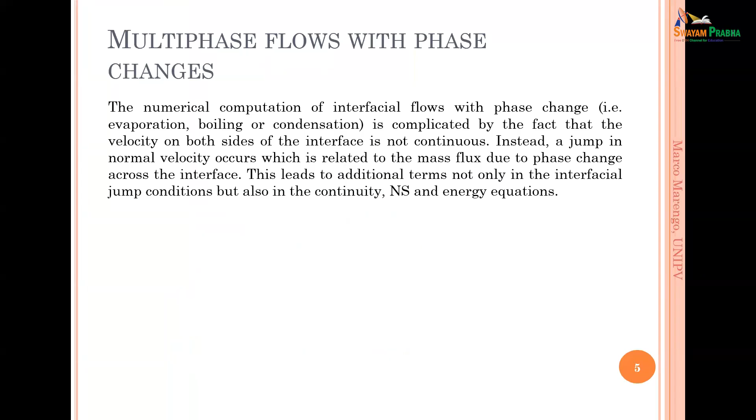Okay, let's continue. One of the problems is that when using these kinds of simulations, at the interface you have a discontinuity. Imagine in VOF you have values like 1, 1, 1, 1, 1, 0, 0, 0, 0, and then some other numbers - you are constructing the surface. But what's happening is that all the values related to the volume fraction are changing. So at the interface, we are even changing the velocity, and we may have one velocity that is different from the other. But as I said before, the velocity should be the same.

So we have a jump in the normal velocity due to, for example, phase change. The phase change is complicated in VOF or level set methods because we have a jump not only in the velocity, but also in the temperature and the pressure. Between liquid and vapor there is a jump in the pressure, and there is a jump in the temperature. So we need to deal with this in the proper way.

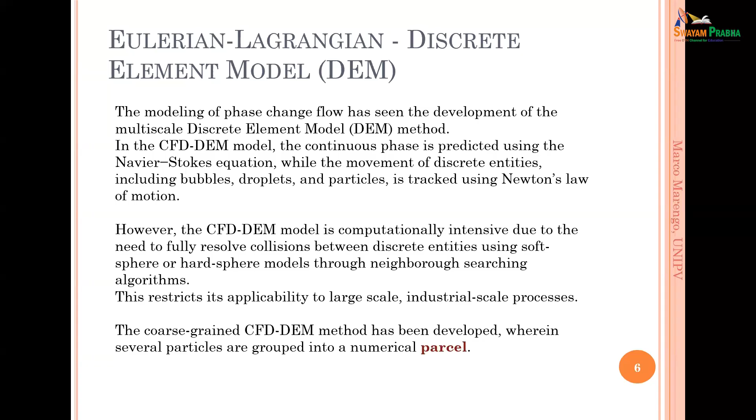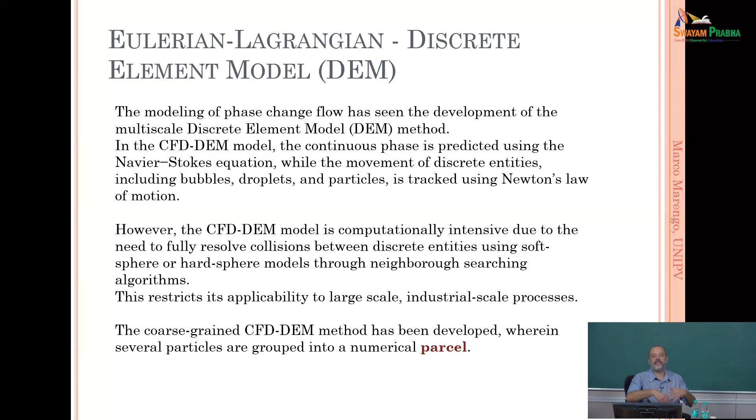With phase change, we have other options as well. We can use an Euler-Lagrangian approach, a DEM model with phase change. As I discussed, one way is to have several particles, droplets, or bubbles inside a parcel - so inside a digital bubble or digital droplet. This is interesting when we have large-scale processes like heat exchangers, evaporators, condensers, and so on.

For a DEM model, these are the equations of conservation, and let's talk about that because it's interesting. We have the conservation of mass, and already you see one change when we have phase change: we need to add one term linked to the fact that we have a change in the component, as we wrote when dealing with multiphase flow. So if we have a phase change, we need to include a term linked to the fact that we have liquid going to vapor or vice versa.

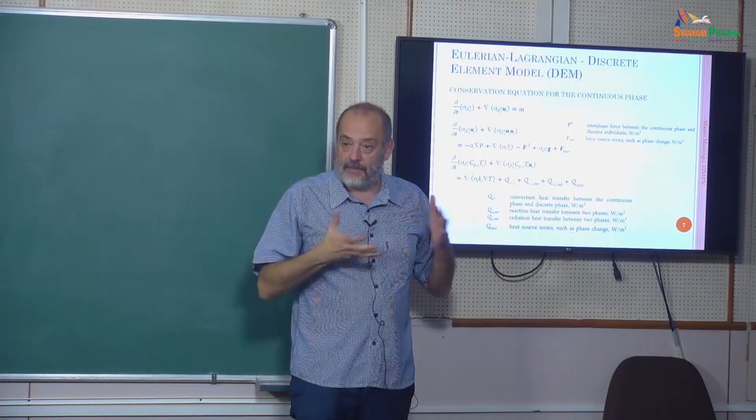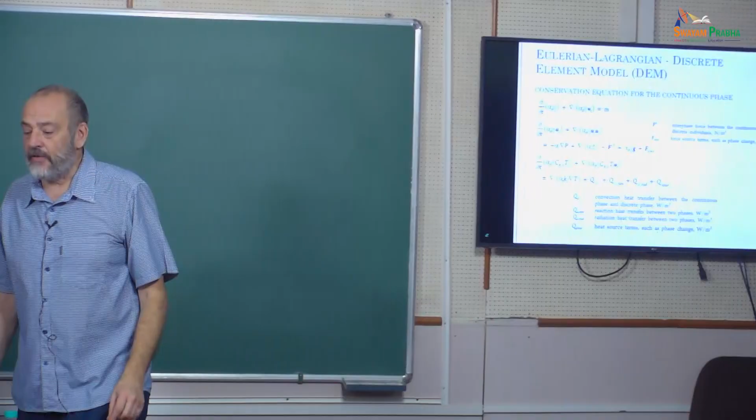Then we have another important term in the momentum equation, which contains the interphase force between the continuous phase and the discrete parcels - the force between them. But if we have phase change, we also have a force source coming from the phase change. Imagine a droplet that is evaporating very fast - we have a flow, the so-called Stefan flow, from the droplet producing vapor that goes outside. This creates pressure, because every time there's motion, there is a pressure. So this is a force, and we need to include this force related to the phase change.

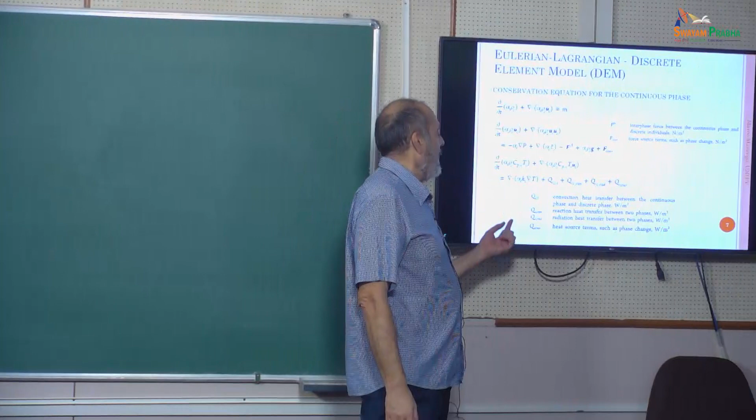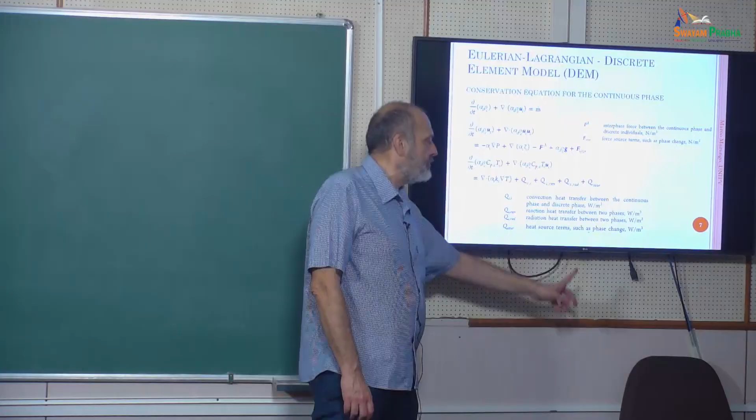Then we have another term linked to the energy equation. Here we have convection, we may have reaction between the two phases, we have radiation, and we have a heat source term that is linked to the phase change.

Now, the problem is that with the Lagrangian solution, we need to write the equation of motion for the parcels - a classical Newton's law for mechanics - and what becomes very important is understanding which forces are acting. Same thing for angular momentum: if particles are not spherical, they can rotate, so we may have angular momentum. The Euler-Lagrangian simulations are very strong in this respect because we can really capture different situations in terms of rotation and rotational velocity of the particles.

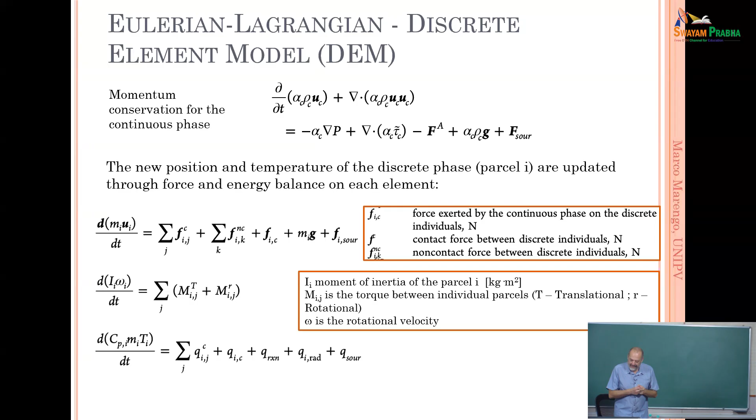And then we have the contact force, so this is what I said now. And then we also have the force that is linked to the phase change.

So in order to describe where is the closure, where are the closure equations? Of course, the closure equations are here with this Fa, because the force that is felt by the continuous phase is the same force that is felt by the parcels. So we need to have the coupling.

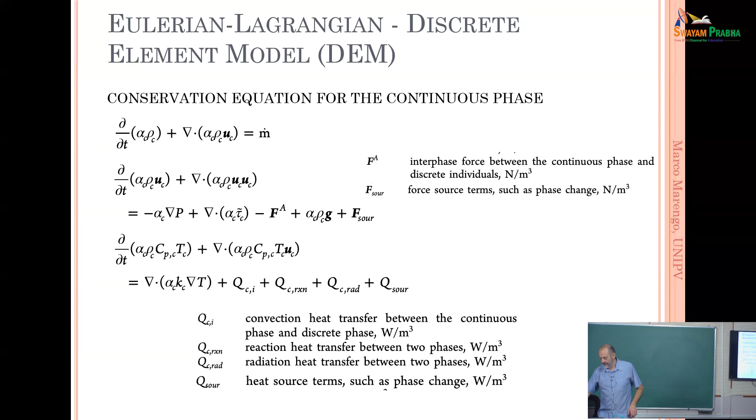The coupling is the secret, let's say, of the simulations. And so we have, for example, Fa in the continuum phase equation, the momentum conservation, written again in terms of the forces that are acting on the parcels.

And here we have the force linked to the parcel interaction.

We have the buoyancy, for example. We have the Saffman and Magnus force. The Saffman force is a lift force. The Magnus force is a force that is related to the spinning of the droplets.

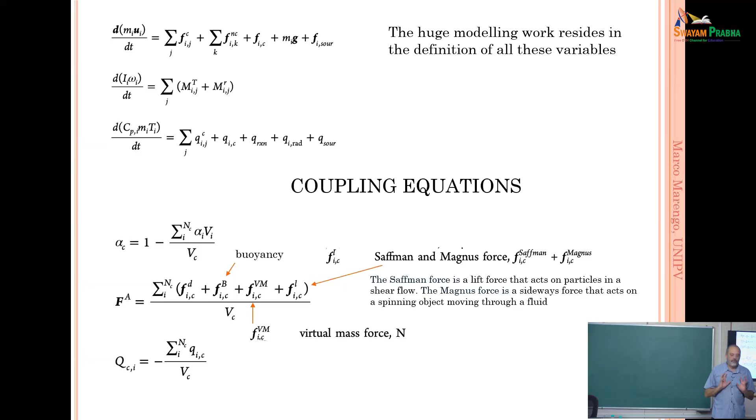If you have an example: if you have a ball, a basketball, and you throw the basketball from a building, it's not going to go in this direction, but it's going to start rotating, and this rotation is going to change the motion.

So it's going to, we can say, go to spiral. So this is the Magnus force. I'm saying this because maybe you know it, but I want to be sure.

And what is also interesting is that there is a virtual mass force, which is the force of the parcels together that are acting on the continuum.

Because the fact that we have, let's say, the disperse flow is adding mass to the system locally. And this is, of course, something that we need to consider inside the so-called virtual mass force.

The things are becoming really very complex because, for example, the contact force has a tangential and normal component, and then look at this—there are pages and pages of equations. So I stop here, but only to help understand it.

And these can change from one paper to another, because, of course, everybody has ways to tweak the problem. So, for example, we can say that the normal component is a factor, Kn, and look at the equation for Kn and all the other equations here to describe what is happening.

So it's becoming a little bit tricky.

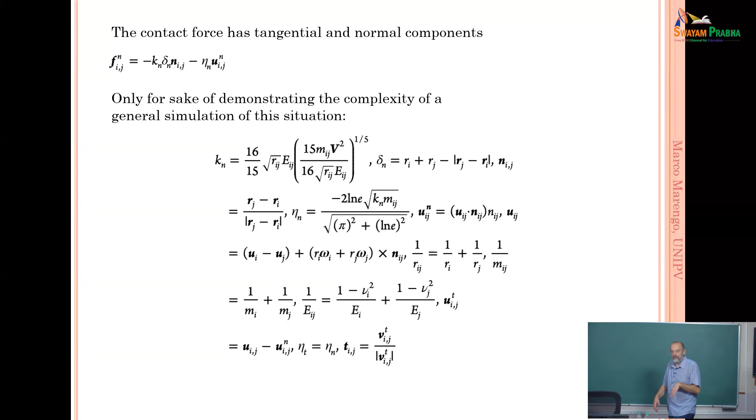For example, these people are putting 16/15. Okay, someone else says, oh, I don't like 16/15, it's 1.2. Okay, good, let's tweak this value. And so on.

And of course, this can be really— I don't want to give any explanation of that, it's not my field. I'm Euler-Lagrangian is not my field, but I know the principle of these kinds of simulations.

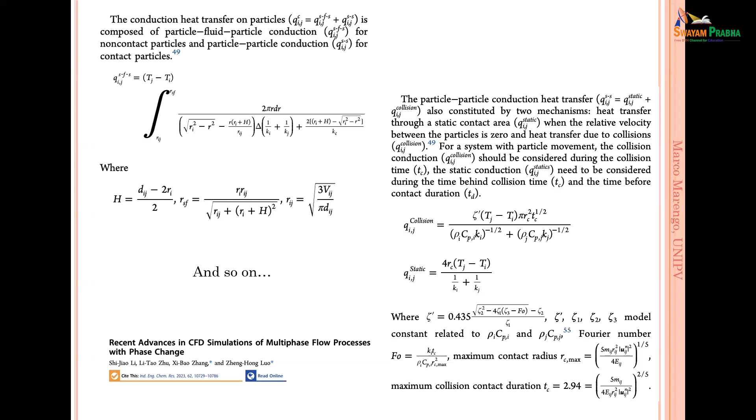...still research. As I said, all these coupling forces, coupling energy, heat that is going from one phase to another is a question of tuning in many cases.

So it depends on the material, for example, the conductivity of the particles, and how can we deal with the conductivity of the parcels, because the parcel contains many particles, maybe with different conductivities, because we don't have only one solid particle, maybe we have different components of the solid particles, and it's becoming real.

If you think about the applications, it's becoming really very complex, because you may have really, in the application, different components, different phases, and we have reactions, chemical reactions.

We may have Eulerian-Eulerian model, again, the same problem. Again, I'm not entering this, but it's interesting to know that we may have an Eulerian-Eulerian model with phase change.

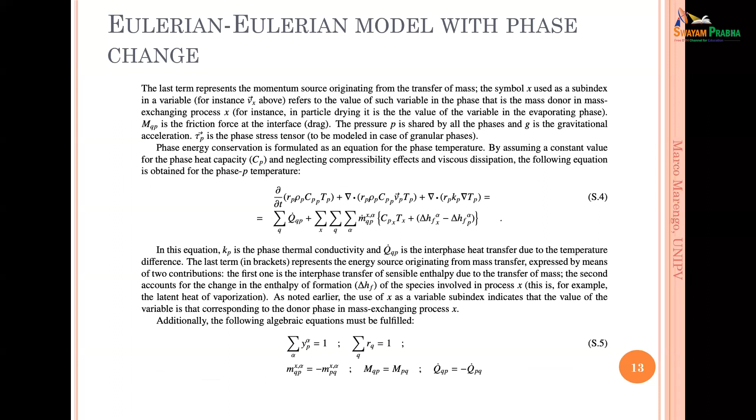One can think, okay, it's complex. But I didn't speak about one thing until now. Nobody said something, I was silent about the turbulence. Because of what I said, imagine how amplified it is when we are also considering turbulence. Until now, it's laminar flow - we didn't put anything about the Reynolds stresses and so on.

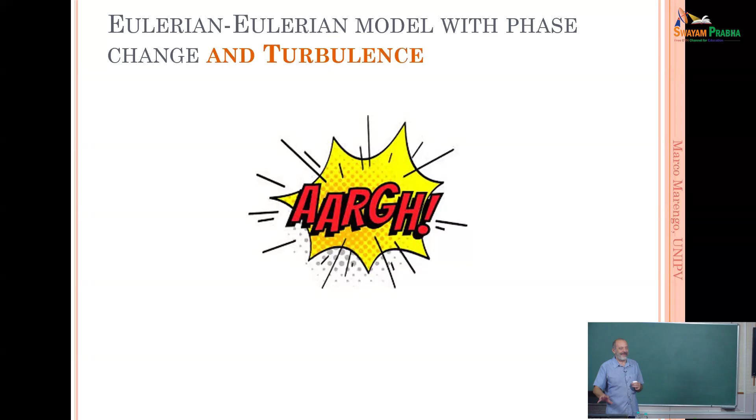But if you are adding also the turbulence, then it's becoming very complex. So I didn't want to put only that. I said, okay, it's becoming too difficult, of course. It's even something that I should really study in detail. I must be very honest.

When I'm dealing, for example, with my droplet simulations, turbulence is not entering the process so much. When you have a droplet impact, you have vortices and all this kind of stuff, but not really turbulence. But my colleagues, for example at the University of Wien, Alfredo Soldati and other people, are dealing also with turbulence. And when you're considering turbulence in sprays, imagine this is becoming really, really difficult.

So this is really the frontier of research. I need to stop because it's not for a basic course, and I'm not an expert because I'm not doing this for my research. But this is becoming something very, very complex.

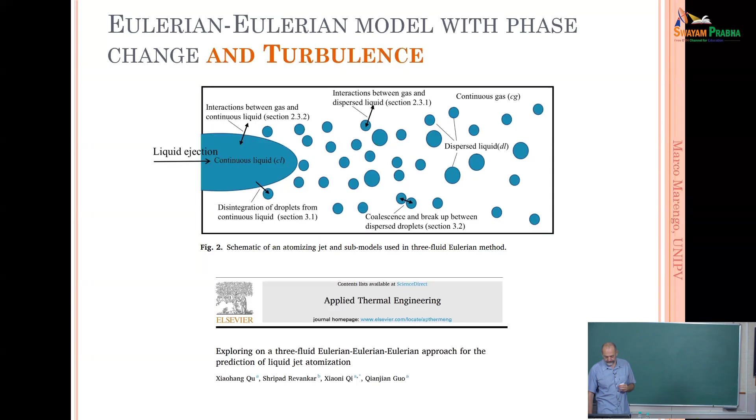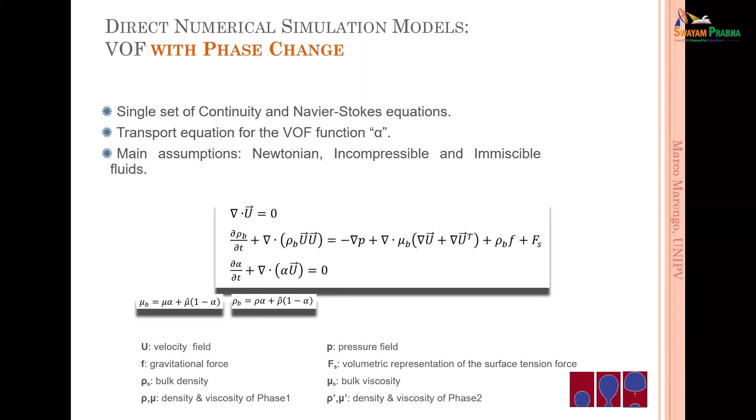Let's come back now to something a little bit easier, the turbulence. We would like to understand how to deal with the VOF when we have a phase change. So what is happening? We already wrote the expression of the VOF, and as I said before, what is important is the Fs.

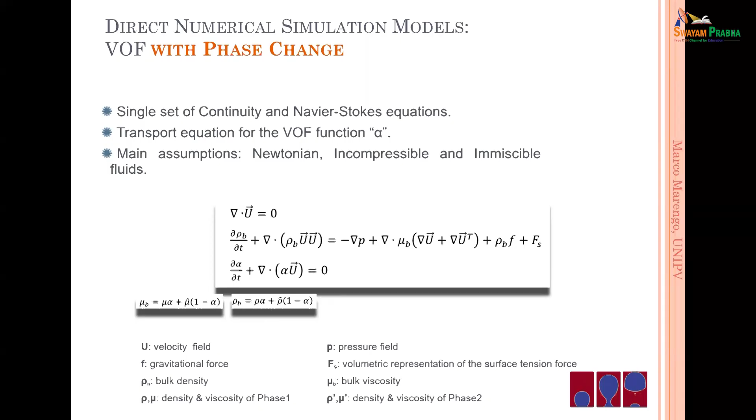In the VOF, we have a volumetric representation of the surface tension force. We may have different tools to do that. We have interface sharpening, which is important to have a very sharp, nice interface. Everything is fine - but one of the problems of the sharpening...

When you're doing, for example, an air bubble rising in a pool - this is a box containing a liquid, and we have a bubble rising. At a given point, instead of being very symmetric and going up, this bubble is going to dance - it's going to move. This is not happening, of course, in reality. It should go up and stop.

But this is a numerical problem, linked to the spurious currents that you may have. So the droplet is really dancing - it's not even going to follow a trajectory to the center, but is still moving a little bit. In this case it's going to the right; next simulation it goes to the left, because it depends really on the situation.

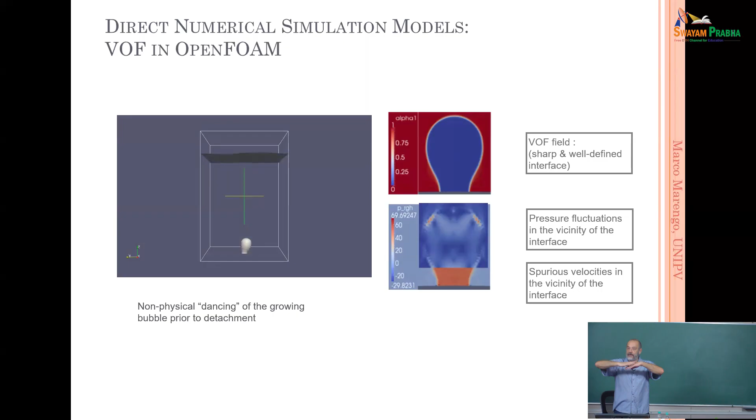Then you have the bubble going to the surface, and the surface moving - this is a classical case where we have a problem with spurious velocity at the interface. You can see, for example in this image, that we have pressure fluctuations at the interface. This is due to the fact that we are reconstructing the surface using a kind of approximation of the volume fraction value when we have a variation from 0 to 1 or from 1 to 0.

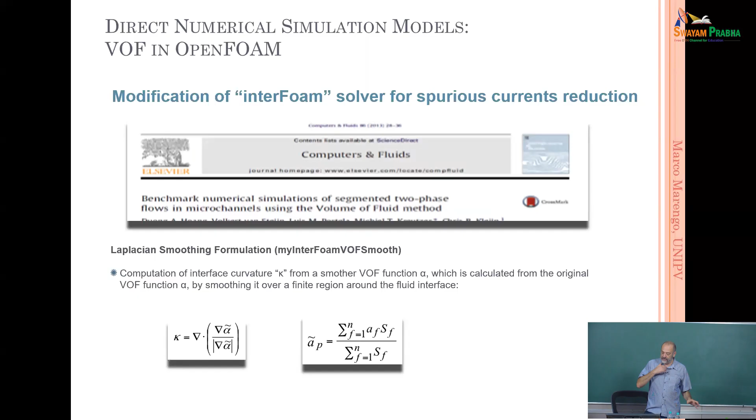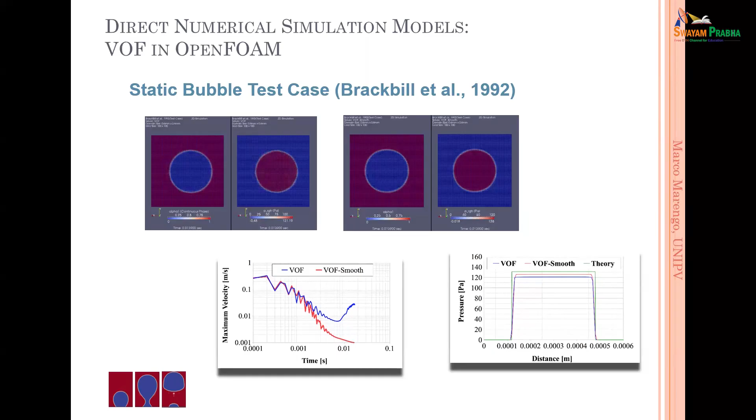Now we need to avoid this. There are different ways to do so - for example in OpenFOAM we have interFoam, VOF smooth variation, and so on. So we have different ways to do that, and in fact things are going to be better. You can see here that the maximum velocity of the spurious currents, for example in the case of VOF smooth, goes really down a lot, while the common VOF has a problem with that.

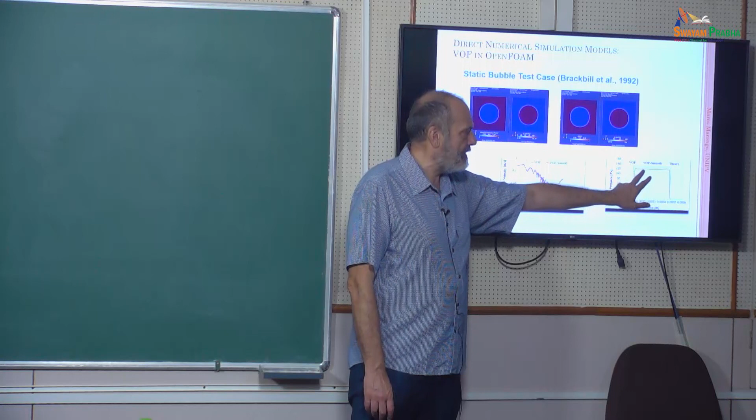The pressure theory is the green line, and the capillary pressure is the red and blue for the smooth and non-smooth solutions. As I said, level set is much better in this case, so the capillary pressure you get with level set is good.

We have a problem with mass conservation, but also with VOF, if we're not paying attention, we have a problem with mass conservation. At the end they are similar, but for the capillary pressure, the Laplace pressure, we need to accept it's not exactly what we'd like to have - there's a little change. You also need to consider that the theory assumes a very sharp interface, and here the interface is not really one cell.

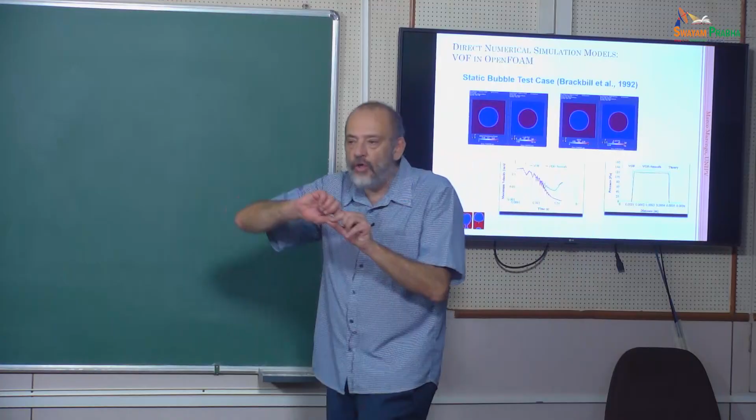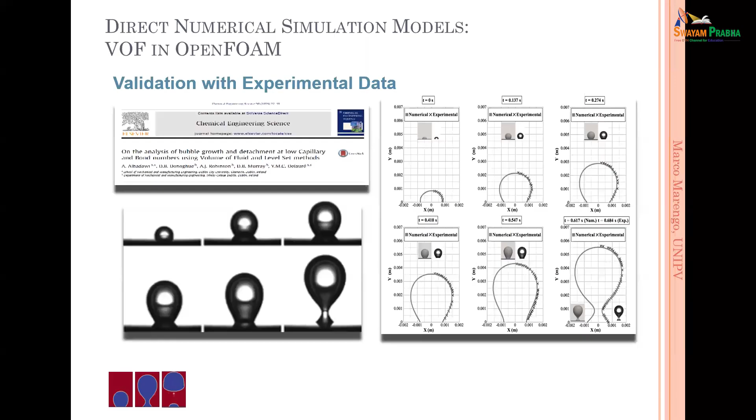One can validate the OpenFOAM results, and they are very accurate. This means that when dealing with problems like droplets, bubbles, single droplet, single bubble, or a bit more than single, the approximation is quite good at the moment.

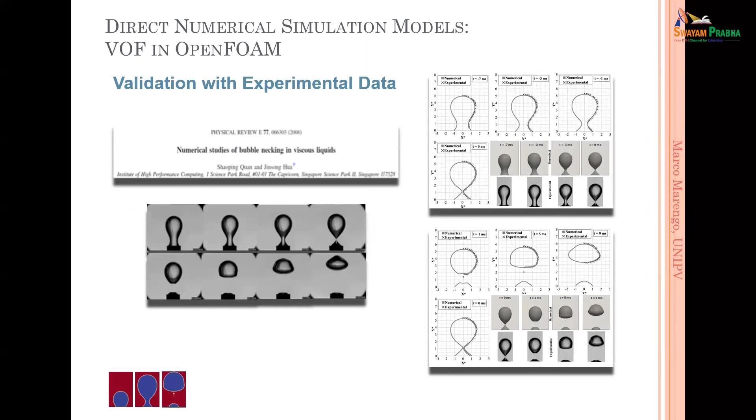There are also codes that are not commercial, from other groups around the world. There's also another code called Basilisk from Professor Stéphane Zaleski in Paris, a very good code for that. So we are able to simulate.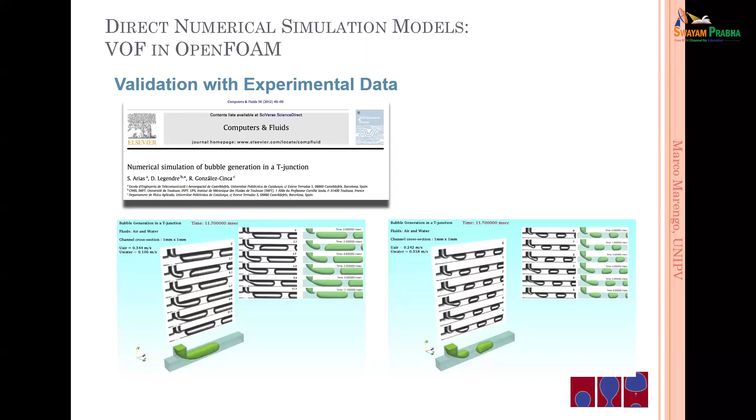So it's really interesting what we have here. You can see, for example, another problem where gas is entering a channel - we have a T-junction, and you can see these images, this is the VOF simulation, and it's very, very precise.

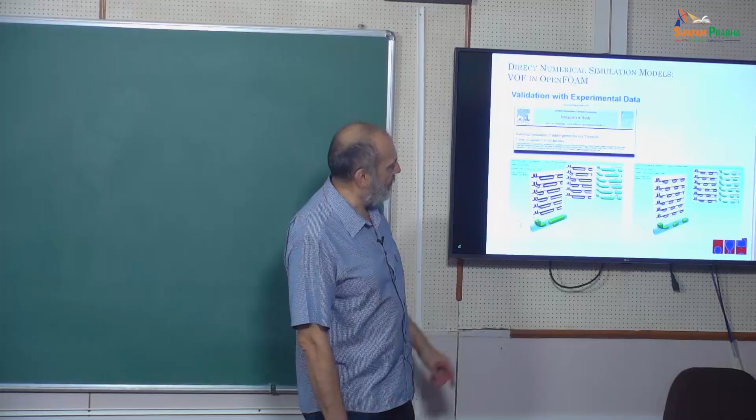One thing that happens if you're not precise enough with the simulation is you may always have a little bit of gas, so it's difficult to get the right time for the breakup. This is a test - these are usually the tests we do when comparing with experiments, the classical way: bubble rising on a pool, the T-junction, droplet impact, and so on - the normal tests for this.

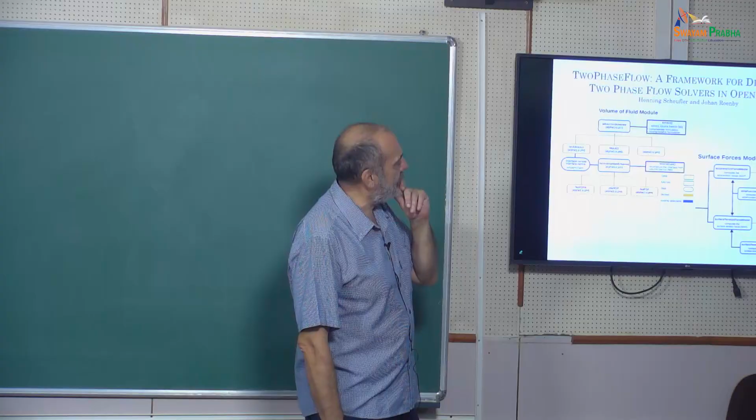This is a slide I got yesterday from a student, Raul, who is working in this field, showing what is done in OpenFOAM about the reconstruction of the surface and the surface forces. You have different cases, and honestly...

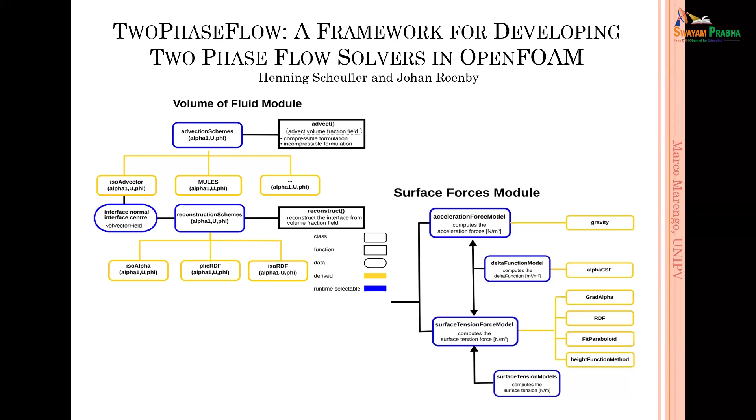You need to choose the right one - it's a combination of the advection schemes and the reconstruction schemes. There's no general rule, so you need to really try your best combination, try different cases. Raul, for example, did this at the very beginning of his master's thesis because we wanted to know, for our case, which could be the best combination of advection and reconstruction.

This is becoming a little too detailed for today, but only to tell you what is happening. We can do many different simulations, also with heat transfer.

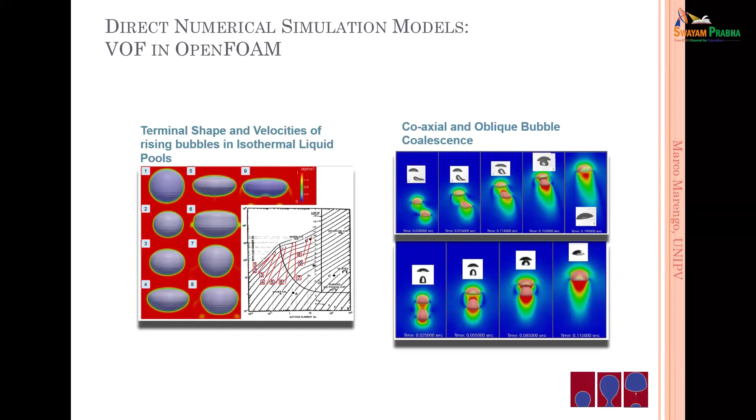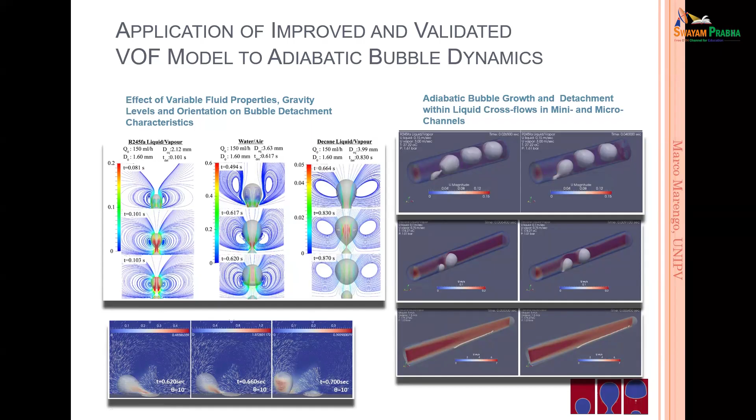This is, for example, our simulation of a bubble that is growing. Again, as I said, we need to patch a bubble to allow it to grow and go away when we have a phase change. In this case, it wasn't a phase change yet, but we have a hole and we inject air - the air makes the bubble grow, and then the bubble goes away with breakup. So it's interesting because we are producing bubbles like a Taylor flow inside the pipe.

Now, what is happening again when the VOF is with the phase change? When we have the phase change, as we saw before, what is changing is the conservation of mass, that we have now a source term linked to the phase change. Can be liquid to vapor or vapor to liquid, can be condensation or evaporation.

We have a surface term accounting for the surface tension as we did before, and we have a source accounting for the gravity. And here we have the source term representing the heat of evaporation. And we don't have here terms like the force linked to the phase change. Remember that there was a force linked to the phase change? No, we are not considering this.

Honestly, someone tried to put this, and there are codes where, even in OpenFOAM, if you want, you can add this term. Some of my colleagues said, okay, I did, but there was no change really. So otherwise, you should add one term that is a kind of pressure force linked to the fact that we have a phase change. But if the phase change is really not super fast, it should be okay. In fact, in the general theory I did, there was also a term to consider, but it's okay. In this case, it's not.

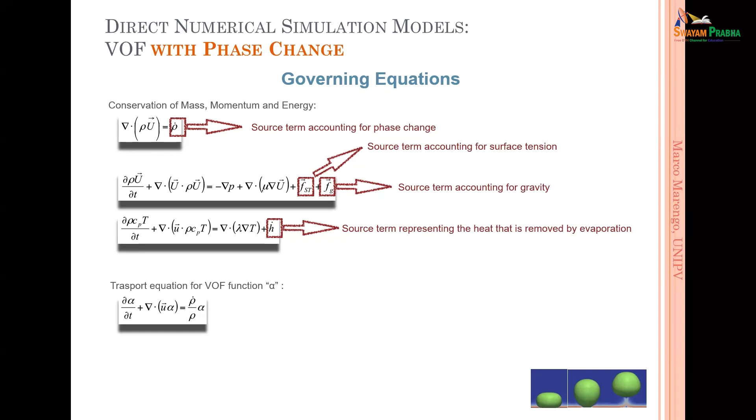And the big change is also with the phase transport equation, because we need to consider that we have a density variation in time due to the phase change. The local and time variation of the density means that also the transport equation is changing form. And we have now a rho dot. If you think rho dot divided by rho multiplied by alpha, it's nothing else than alpha over t, so it's the variation in time of alpha, but due to the phase change, because we have a rho dot. Again, we have the bulk fluid properties as an average with the volume fraction.

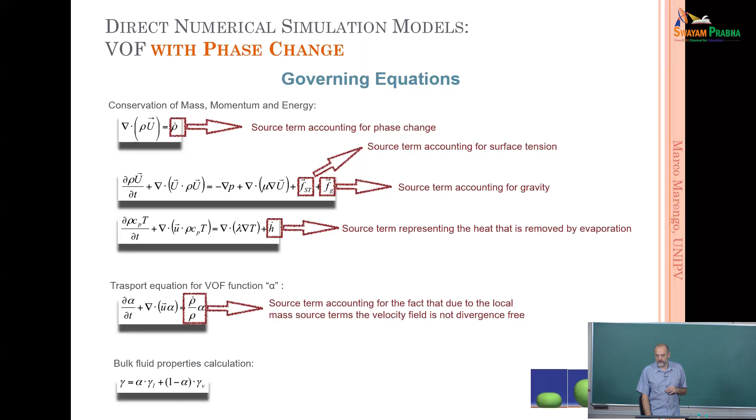When we need to consider phase change and we have the energy equation, one of the very critical points is to understand how can we calculate the rate of evaporation, for example. We have a droplet that is evaporating, and we would like to know how much mass from the liquid to the vapor is passing through the interface.

So we can use, for example, this expression that is saying we have the temperature of the interface. Which is the temperature of the interface? It's the temperature of the cells where we have a value of alpha that is different from 0 and 1. So imagine 0, 0, 0, 1, 1, 1, or vice versa. We have cells where we have something in between, and they have a temperature, because in OpenFOAM, which is a finite volume method, in all the volumes we have a temperature.

So this temperature is the interface temperature minus the saturation temperature. So we are not considering metastable conditions. This is another point. We are in equilibrium, not metastable. We are considering the saturation temperature. We are not going inside the two-phase region. Divided by what? Well, we can divide it by the latent heat, normally calculated at the saturation temperature, which is fine.

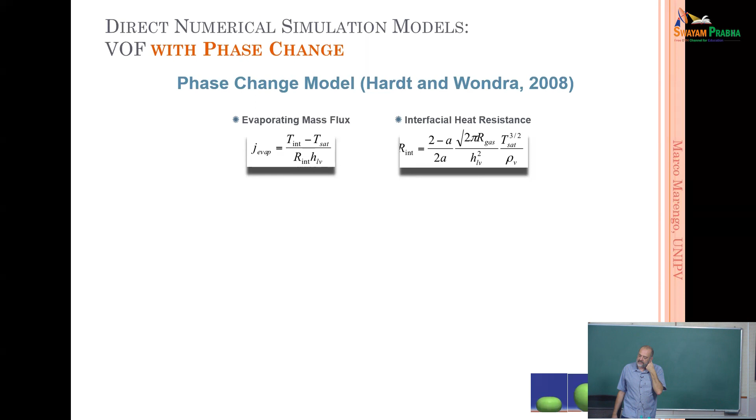I mean, we are playing with this. I'm not satisfied by this, but okay. There are, let's say, molecular simulations that are saying that this should be in this direction. This is coming from statistical physics, and we have this term that is the interfacial heat resistance that was proposed by Hardt and Wondra in 2008.

The point of this equation is that from the point of view of statistical physics, this part is fine, but then we have 2 minus a divided by 2a, and the authors are saying a is a value between 0 and 1, which is of course a big problem, because when it's 0 it goes to infinity, when it's 1 it goes to one half, but which is the right value is a problem. And usually, here there is a debate. Someone is using 0.5 in the middle. We didn't have good results with 0.5. We use 0.9. I don't know if it's right or not, but we can play with this.

Another point is that we are going to have this J, which is the value of the evaporation, for example, and how to conserve the mass, because we said that the VOF has a problem with mass conservation once you are reconstructing the interfaces. If we have a phase change, it's even worse.

So what we have done with Tassos, Anastasios Georgoulas, Dr. Georgoulas, this is our work in 2011, 2013, something like that. We use this method.

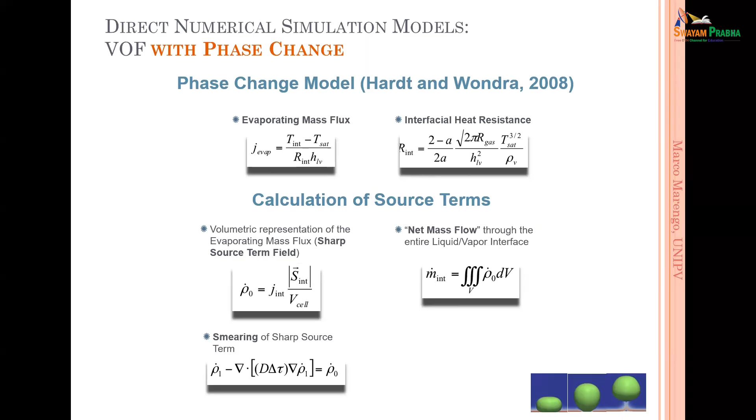So in fact, it's really due to this kind of smearing of a sharp source term. So instead of reconstructing precisely the interface, before reconstructing the interface, we are allowing the surface to have, let's say, the interface having a given dimension. So what is happening is that we are going to have, in fact, a value that is not precisely determined. So there is a gradient of alpha, okay?

And we have a flow rate due to the phase change, because the evaporation is going from the liquid to the gas. So in this case, we are going to have at the end a kind of two interfaces. And the position of the right, let's say the real interface, is something between the two. We don't know exactly which is the position.

But now we have a degree of freedom, in the sense that if we are landing to have this condition, we can say the position of the interface will be the position to conserve the mass. So we are forcing the position of the interface in order to conserve the mass. It's working. It seems that it's working because we compared with many cases and it seems that it's working. But, okay, this is a way.

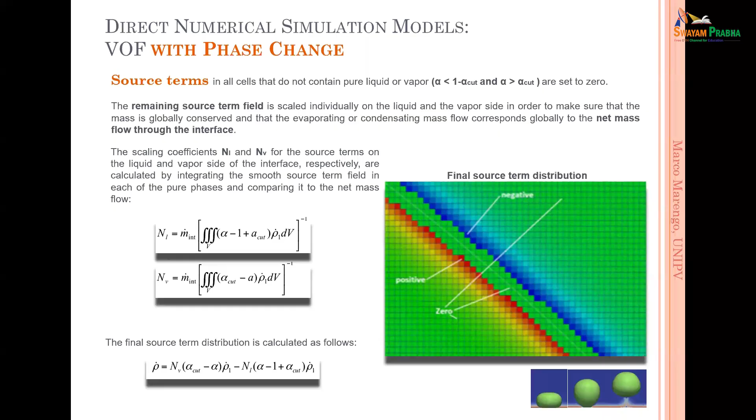I think that it's not really our idea. We got it from another paper before. There was something not really the same, but something similar. So, but we are doing this.

Of course, what is happening is that we are trying to understand where alpha has a gradient, and so we are considering something between the liquid and vapor with a given accuracy. For example, we are putting 0.05 from one side to the other. So we are looking at when it's 0.05 and 0.95, and in between there should be an interface, and we are dealing with these points in order to determine which is the right point to conserve the mass.

A classical way to check if you did everything right is to compare the VOF simulation with a spherical bubble growing in a superheated liquid. So you have a superheated liquid, and you have a bubble inside. Of course, the bubble should grow. And we have even a mathematical expression, so we know what is happening.

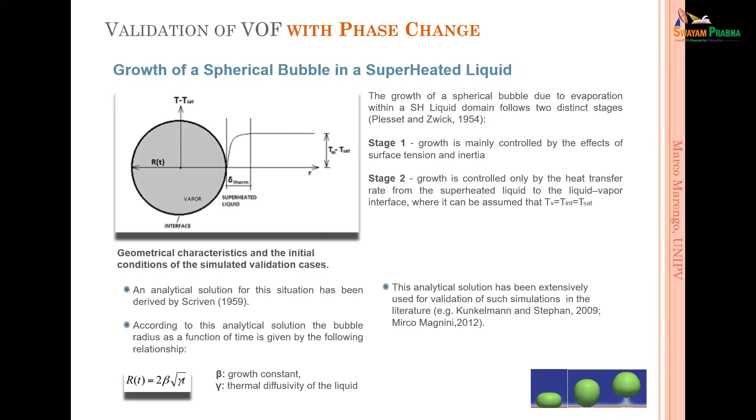There is an analytical solution, from Scriven in 1959. There are other solutions, for example, from Prosperetti and so on. So there are, let's say, solutions of this problem that we can compare with.

So it's fine. There are other people like Kunkelmann and Professor Peter Stephan. Peter Stephan was here, let's say, only one week ago. And Mirco Magnini and many others. They did the same kind of comparison, and this is not too bad.

Again, the tuning parameter, there are two tuning parameters. One is less sensitive, is the alpha cut, these points where we are doing this kind of mass conservation balance, but also A in the Hardt-Wondra model. In the Hardt-Wondra, yes, we had 2 minus A divided by 2A. So we can deal with this, but we found that really, as I said, we can find the value.

And we have a very nice simulation. Pay attention that, for example, in this case, we have 1 micron cell size. So it's very sensitive to the dimension. And why that? Because we need to resolve the interface somehow. So you remember that we have a bigger interface, and we need to have the right position for the mass balance.

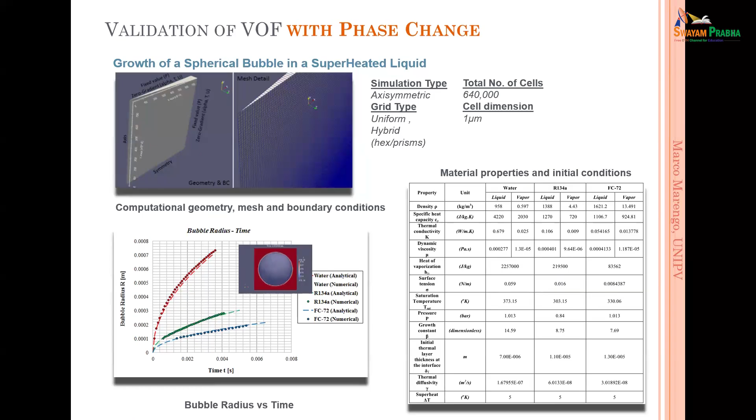In this case, if we have only 2 cells, we're not going to do so much, okay? So we need a little bit more, to allow more cells in order to have a nice estimation of the position. This is the reason why we need to go 1 micron, 2 micron, 5 micron cells maximum. So computation is heavy, but it's quite accurate. It's very accurate, yes.

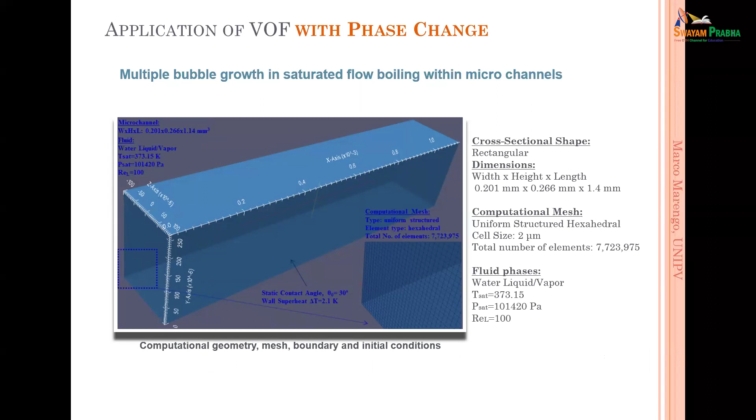And of course, if we have this kind of situation, we can build, for example, study flow boiling. So we have a domain. This is a micro channel: 200 microns, 266 microns in the other direction, and 1.4 millimeter long.

One could extend, no problem to extend, it's only a question of computational time, so you need to wait. The cell size is 2 microns, and what I said before, when I saw some papers arriving with a cell size of, let's say, 100 microns or 50 microns, of course they are trying to do that because their domain is bigger.

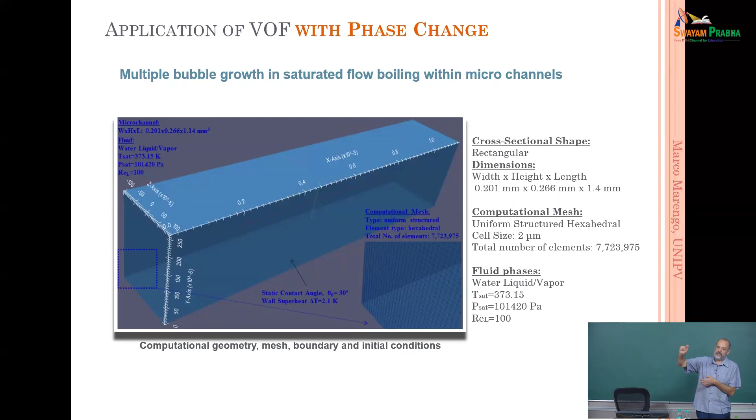Maybe someone is trying to simulate a microchannel boiling system that's like a CPU size, 3 centimeters. And for this one it's 1.4 millimeters. Imagine having 30 millimeters. In 30 millimeters, we can say, oh, but then it's becoming too long because maybe you have, I don't know how many, but with 30 millimeters it can be 1 billion cells. Oh, I cannot do it at 2 microns.

Let's do it at 100 microns. Well, yes, you can, but then you're losing a lot of details, and your simulations are really bad. So it's a compromise, it's really a compromise. In this case, you can work with that, so you can do something.

And this is, for example, the formation of a bubble inside the channel, and then we have a little bit of flow from left to right, and we are forming bubbles. The bubbles are growing, and then they go into the flow. Of course this one is going to decelerate because of the drag, and so the other one is going to catch the first one. So we have this kind of situation where we have the classical generation of a slug flow, with Taylor bubbles inside.

And you can see even what is important in this case, but I don't have time to treat this point, is the contact angle, the wettability, how to deal with the wettability. You can see at the end of this video that the bubble is going against the wall, and the surface is deformed. Let me see.

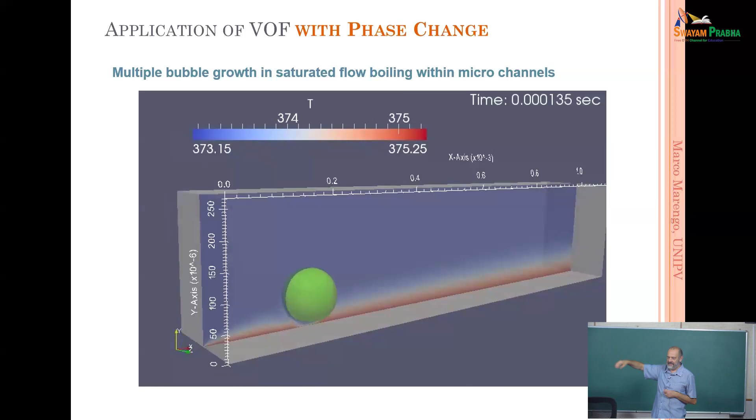Of course it's the interaction, it's a visual. Oh yeah, the wake is there, of course I can understand. Yes, the continuous phase, both phases are with viscosity. There is no turbulence, I don't want to touch this, I'm very scared, so no. But the viscosity is there, yes, because there is a... I didn't put it in, but if you can see the velocity, you really see the velocity of the wake, the vortexes, and so on, this is included, 100%. Also inside the bubble, you can see eventually the circulation, especially when you have a contact, you have the circulation inside the vapor and so on. So this is included, they are viscous simulations.

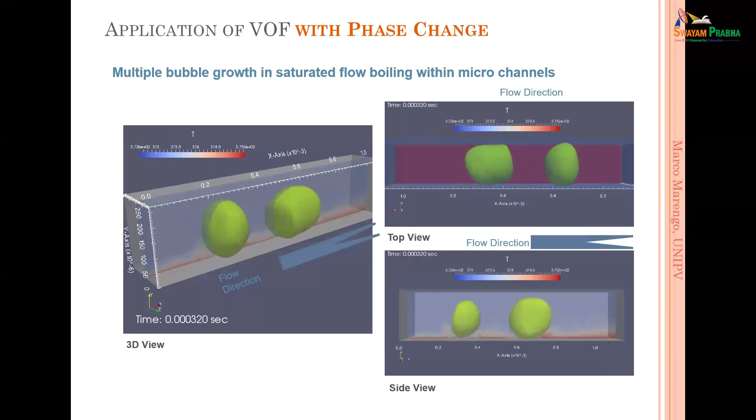And so we can have different cases and so on, and this is the situation. So as I said, at the end I put the list of books that you may read on this topic.

I cited the books that I used during these 4 days. I think I covered all of them, yes, I also finished it. No, I didn't cite this one. Actually, there was something to say about it. It's a book that I published in 2022 with Joël De Coninck on the surface wettability effect.

We explore the surface wettability effects on phase change. When a phase change is happening, we have different wettabilities, and it's possible to discuss the effect of the wettability, and so on.

Then we have the list of papers that we explored over these 4 days. It's a very long list, a list of important papers in multi-phase flows, and I think that is a very long list also in this case.

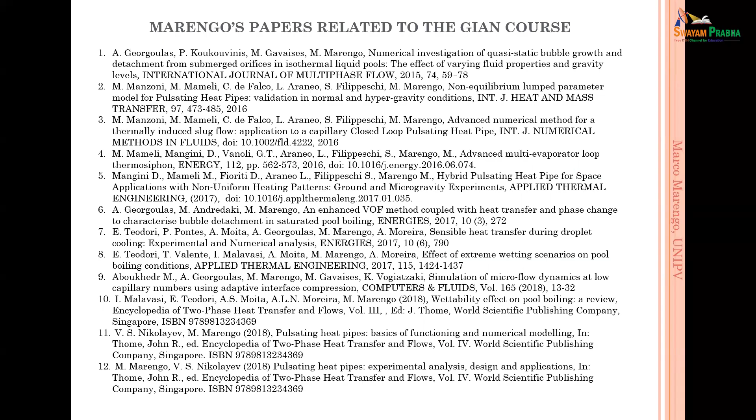And then we have my paper. This is a list of papers related to the GIAN course, the papers I published in the last, let's say, 10 years. Not before, but I think that gives you an idea of the work.

What I'm describing now is really research, and this is emulsion. Emulsions are a particular situation where the interface changes because the surface tension changes with position. It's complex, but this is becoming a research area, and in fact it's published now.

We arrive at 2 microns, 1 micron, but what happens when we go down to 500 nanometers or 100 nanometers? Is the VOF able to capture the physics? The answer, in the next paper we are writing now, is that the answer is no.